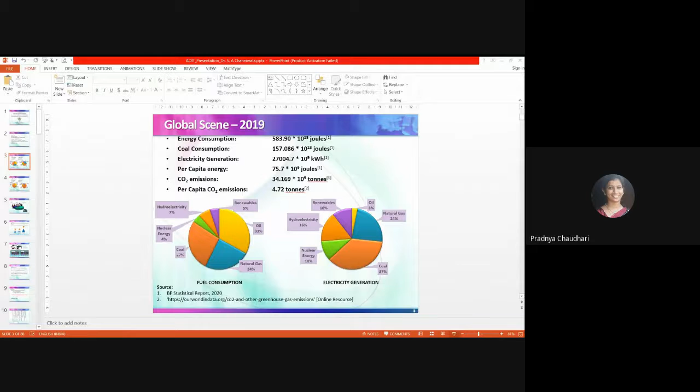Say if you take NOx emissions per year from the transportation sector... Am I audible? The slide you are presenting, we are able to see only the global scene 2019 fuel consumption and electricity generation slide. Should I go back? Is this what you want? No, this is visible, but you are talking about a different percentage, so I am thinking you want to show a different slide. I think I am not able to understand you better. Is this slide visible? Yes sir, it is visible as the global scene 2019 slide. I think the third slide, sir. This is the first slide, okay. Third slide, is it all right now? Yes, yes. Is the third slide visible? Yes sir, correct, I will go slowly.

I have already spoken the numbers, so I will not repeat it. But this is the global scene. Yes sir, correct? Yes. This is the Indian scene.

Everywhere I do give the references. Whenever I give any data, it is from the standard references. Okay sir, okay, okay. This one is only the third slide, okay? Fourth one.

Now coming to the emission part, I already discussed, but you can see here the NOx emissions if you focus on this, from the transportation sector it has crossed more than 20 in 1990, and in 2020 with control measures we have come down to about 17 million metric tons. If we take all sources, it goes to more than 140 million tons of NOx. Then coming to particulate matters, you will be surprised to notice that this emission is less than NOx emissions, because mostly this emission comes from diesel, while NOx comes from all sources. Diesel also gives NOx, but the temperature levels in diesel are more than what we get in petrol, so NOx is higher.

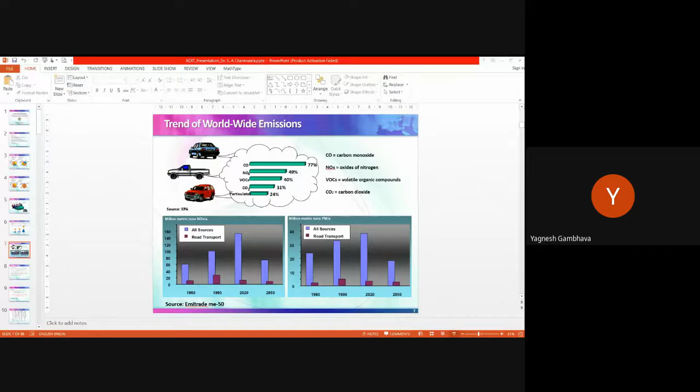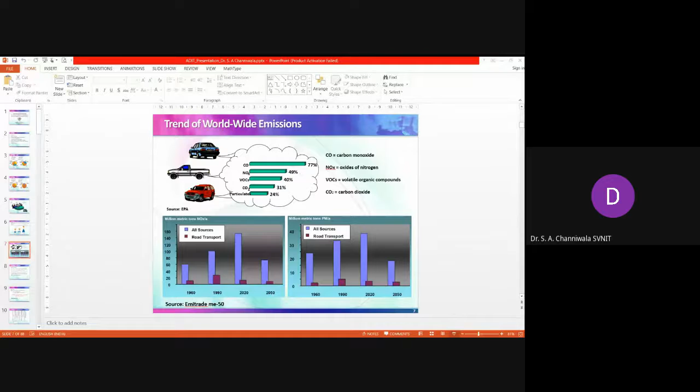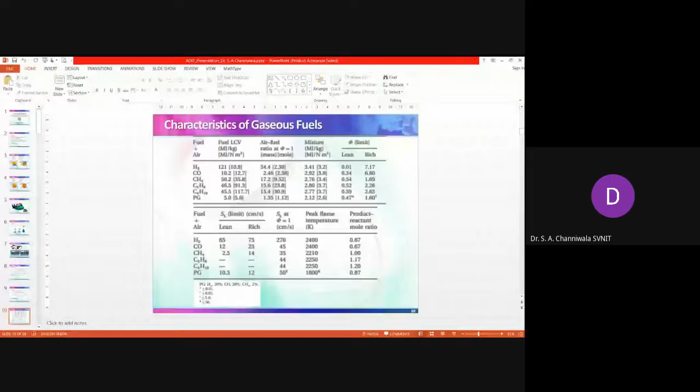Sir, please put it in presentation mode. It is already in presentation mode, it is not a PDF. Press F5. I have already pressed F5. One minute. No change. Let me call the support person again since this is already in presentation mode. Tell them to press F5 again, it already says that. We are already in presentation mode. Now check if it has changed. Okay, do it that way, don't go full screen. Is it visible now, Ronak? Yes sir. I am sorry for the disturbance.

The most important part here is the mixture CV and the equivalence ratio limit range. That particular range tells you in which limit you should control or design your carburetor, otherwise your engine will not work, it will not fire. Similarly, another important limit here is SL, the flame speed.

Hydrogen has a maximum range of flame speed, while methane has a minimum of 2.5 to 14, and that's why CNG fuel engines suffer from efficient combustion problems. If you take laminar flame speed at an equivalence ratio of unity, hydrogen is maximum at 270 centimeters per second, and this is not only advantageous but equally disadvantageous because it gives rise to backfire problems.

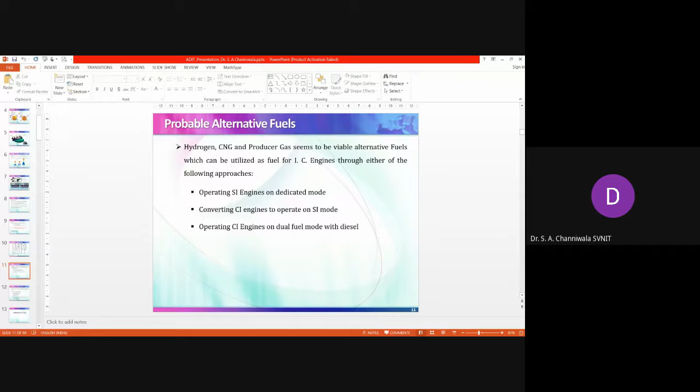For better utilization of alternative fuel on existing IC engines, certain modifications are required based on characteristics of fuels. These include changing valve timing and valve duration, changing the compression ratio, optimizing spark advance, reducing or increasing combustion duration, and your ignition system may require changes. You may need higher voltage to meet minimum ignition energy requirements, and your carburetor or premixture has to be designed according to the flammability limit.

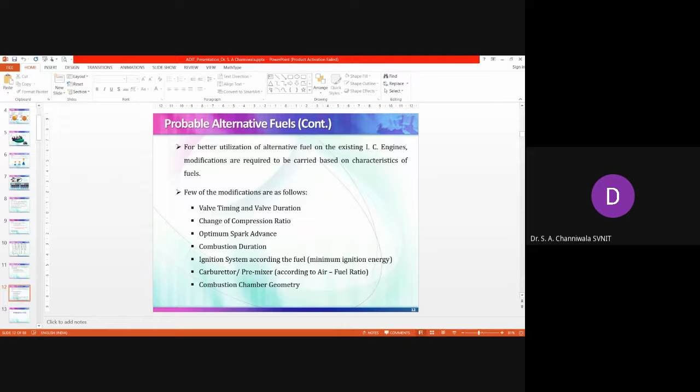It has a very wide flammability limit, 4.72 to 74% by volume. That means it allows utilization over an extremely wide air fuel ratio without misfire. Because it is in gaseous form, it eliminates the problem of atomization, evaporation, mixing, and recondensation. It has a very low ignition energy, which means it allows utilization of spark or even hot wire and diesel ignition with equally good performance.

Because it has a low ignition energy and its flame speed is very high, its instantaneous burning makes it possible to approach the actual engine cycle to the air-standard cycle. This is a major advantage with hydrogen as a fuel.

Then its low emissivity, the flame has a very low emissivity. It reduces heat losses to the cylinder walls, and again it will help in increasing the thermal efficiency of the engine.

Then its self-ignition temperature is quite high. That means you can operate at higher compression ratios without any problem of auto-ignition. It is an extremely clean fuel, less toxic, no poisonous fumes from the exhaust, and no carbonisation in the engine.

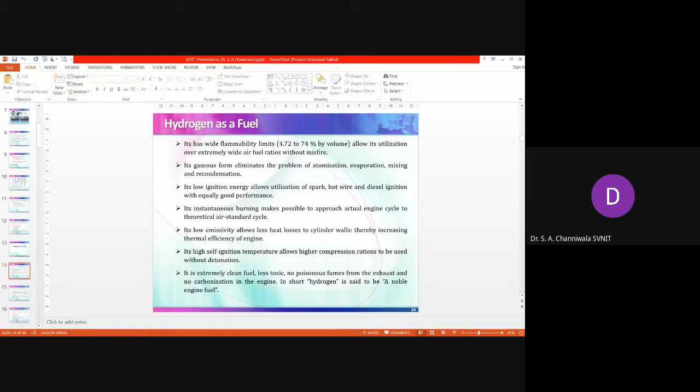So I will call it, hydrogen is said to be a noble engine fuel. Now, anything has its own limitations and problems.

So early researchers who were working on hydrogen were unable to operate above 60% of stoichiometric air fuel ratio because they faced a serious backfire problem. Why does backfire occur? Hydrogen has a very low ignition energy and very high flame speed. That makes backfire occur.

Any high temperature hotspot in the combustion chamber, such as the spark plug, exhaust valve, or carbon deposit, may serve as an adequate source of ignition energy. It will ignite the incoming hydrogen mixture, and backfire will occur. Even the residual gas remaining after the exhaust stroke may also ignite the incoming charge. This is all due to the low ignition energy of hydrogen and its very high flame speed.

One more mechanism has been identified, the non-thermal mechanism. In a multi-cylinder engine, two or more ignition leads run parallel in close proximity for several inches. This will induce an extraneous voltage.

Now with hydrogen, the spark gap is also reduced to compensate for the higher ionization potential of hydrogen-air mixtures and higher compression ratio design. This will induce a voltage of very low energy sometimes in the incoming mixture in another cylinder. That means this can induce backfire, ignition in another cylinder without the official spark occurring. These are the few problems.

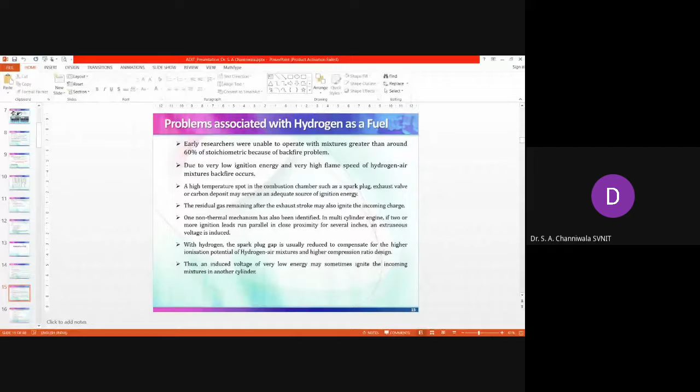So what is the solution? We should understand the problem first. If we carefully understand the problem, then we can arrive at a solution. So how to reduce backfire? Very simple, once we know why backfire occurs we can solve it.

So the first solution is exhaust gas recirculation. There are two problems: backfire plus higher NOx emission. So EGR will reduce flame speed, obviously, and it will also help in reducing the hotspots.

Second, increasing conduction via a higher surface to volume ratio design of the combustion chamber. This will also cool down the temperature levels of the surface, so backfire will reduce. Operating at a lean range will again reduce the backfire.

Many scientists have used the water induction technique. Before I built my engine, IIT Bombay and IIT Delhi were using water induction technique, I will share my experience with hydrogen slightly later. But water induction can also reduce backfire because it gives a cooling effect in the line.

And another important part, delayed entry of hydrogen. Majority of this was invented by us in 1980, when I was working on the hydrogen fuel engine, I will explain what it means. If you can delay the entry of hydrogen, all hotspots will be cooled down by the air, and you will not get any chance of backfire.

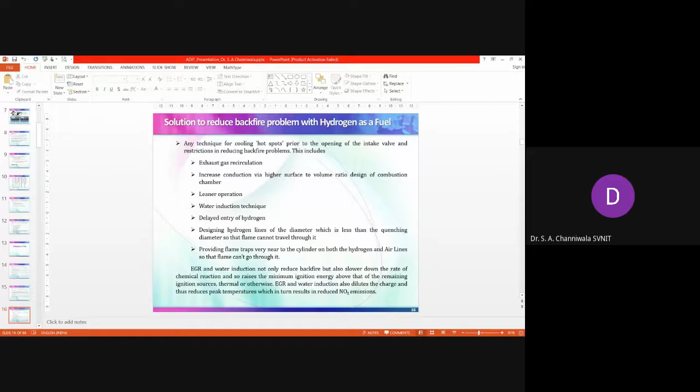And here I have said the same thing I said earlier. EGR and water induction not only reduce backfire but also slow down the rate of chemical reaction, and so raise the minimum ignition energy compared to the remaining ignition sources, thermal or otherwise. This can also reduce NOx because of the lower flame temperatures in the presence of EGR and water.

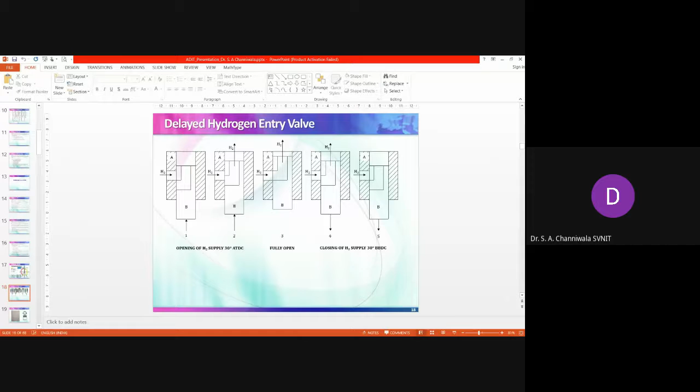This is a cam which we have fabricated. IIT Bombay was earlier, so to speak, a very tough IIT. Everything you have to do by yourself. So this is a cam which I fabricated on a pantograph.

This is the profile you can see. This is the duration for which hydrogen will come. Then we modified the piston geometry to achieve the desired compression ratio. We converted to about 12 as a compression ratio.

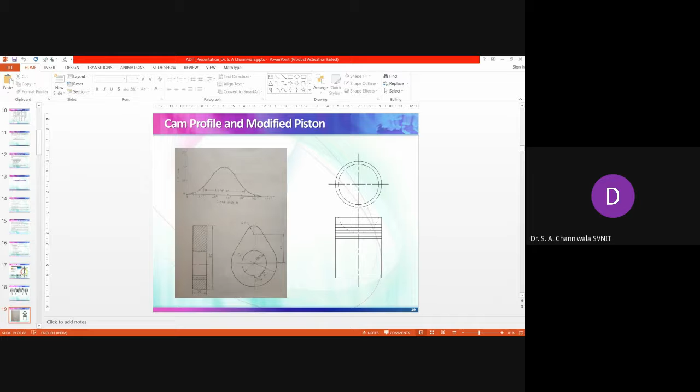And this is the flame trap which we have specifically designed. This flame trap works on the quenching distance principle. We take two brass plates, we drill very small holes. In between the brass plates, we use a 200 micron bronze mesh, so that if the flame occurs anywhere, it cannot travel back to the hydrogen. That is the reason we have put it into the hydrogen trap.

This is also provided into the air line later on, but this is the principle. Your flame can travel only to a distance which is more than the quenching distance. I will explain what quenching distance is.

You take a candle flame, the flame is there. Bring two plates closer and closer to the flame. At one point, the flame will extinguish. So that distance is known as quenching distance.

For hydrogen, it is 0.45 mm to 0.5 mm. For other fuels, this goes to more than 0.6 mm, maybe up to 0.8 mm, right? So this care we will take, and this is my experimental setup.

So while performing the experiment on hydrogen, today I am alive before you, it is God's gift. We were testing leakage in the hydrogen line. All our surge tanks were made of glass, and our pressure gauge glass was borosilicate glass, which can withstand 1.4 bar pressure, but somehow that pressure gauge was sticky.

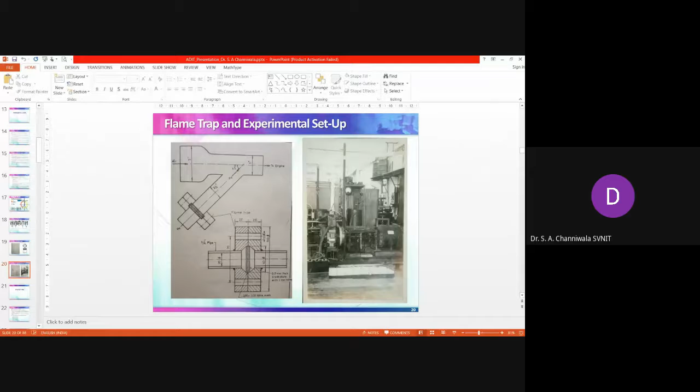And then the water induction technique was not utilized later on. Now, whatever engines you see, they are being operated on our technique, the delayed entry technique. But instead of a cam and other mechanisms, it is now electronically controlled.

Now we come to CNG as a fuel. It's another, you can say, green fuel.

It is cheaper than petrol and diesel. That is one attractive advantage so far as commercial aspect is concerned. It is lighter than air and disperses easily into atmosphere. That is a second advantage.

The octane rating of CNG is higher than gasoline, which means that engines can be operated at higher compression ratio without knock or detonation. Its auto ignition temperature is higher compared to petrol and diesel. Again, we can go for higher compression, that helps.

Then CNG is a cleaner fuel than petrol and diesel. It reduces CO2 emissions by 20 to 30%, CO emissions by 70 to 90%, NOx emissions by 50 to 87%, particulate matter nearly 90%, VOC emissions by 89%. This is the way CNG is superior to petrol and diesel.

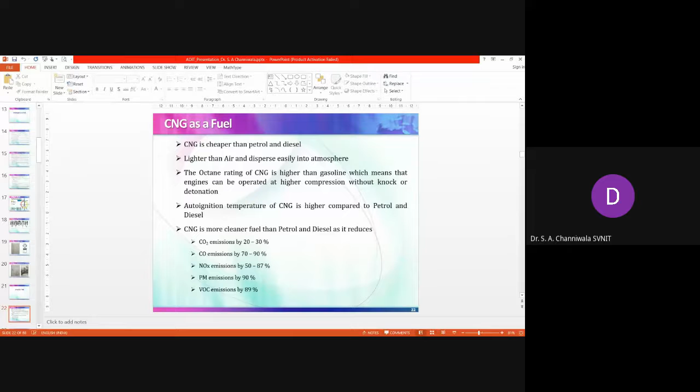Now problems—yeah, I always give the advantages and the problems associated with that fuel. The first problem is CNG gives a lower mixture calorific value and lower laminar flame speed. Lower mixture means 15 to 20% less power output.

Then, if you want to develop a dedicated CNG engine system, it requires more modifications and optimization in the fueling system for complete combustion and better performance.

I will give one idea. When there is a lower laminar flame speed, your combustion duration will be much larger. In order to control that combustion duration, you need to reduce the length of flame travel. Second, you need to provide a certain higher voltage so that you can ignite it bit faster. These are the two modifications which you need to carry out.

That means your L by D ratio has to be less than 1. The 0.8 to 1 range is a limit for CNG as a fuel.

Then CNG vehicles require a greater amount of space for fuel storage, and it is stored at a pressure of 200 to 210 bar. So slightly you can say you are traveling with a small bomb in your vehicle.

Refilling of CNG is a slow process. This also is quite boring. If you are using a CNG car, you have to stand for a longer duration in the queue at your CNG filling station. And the CNG system needs to be tested at fixed intervals of time to ensure the safety of your cylinder. These are the problems.

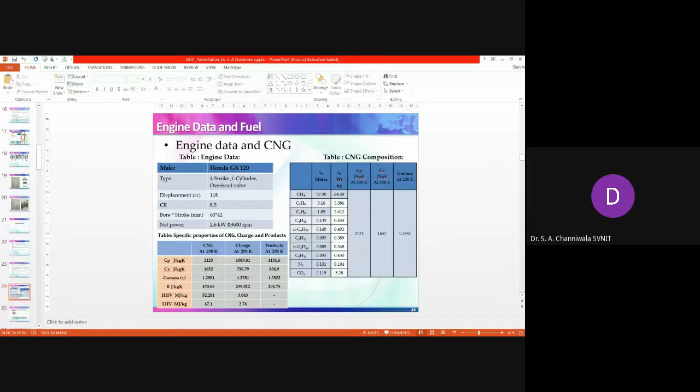Then the simulation process—how it begins. I will go slightly slowly in this particular aspect because I want to let you know how you can simulate it. This process occurs in 5 stages.

First, your suction is modeled, then compression, then combustion, then expansion, and then exhaust. We have carried out the cycle analysis at each 2-degree crank angle, and then carried out a numerical integration. During the simulation, volume, pressure, and temperature at each 2 degrees of crank rotation of the engine are calculated.

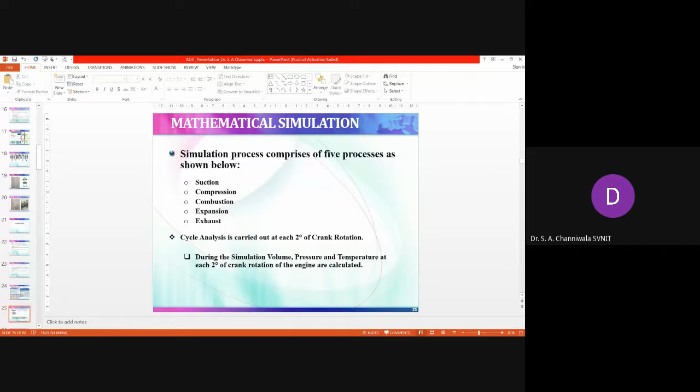Look at the combustion duration. The suction we are starting 10 degrees before TDC to 30 degrees after BDC. Compression is 30 to 24 before TDC. Combustion is 24 to 32. How much duration? 56 degrees is the duration. Hydrogen is much less, almost half, than what duration we use here.

Then the expansion. After combustion, we take up expansion. Anyway, it continues during combustion also, but effective expansion is after combustion, and then exhaust. So these are the durations which have been specified, and this data initially we have taken from

literature and our own experience. And the ignition energy, if you take, is 0.28 millijoules. To meet 0.28 millijoules, you need to go for slightly higher ignition voltage, and that has to be provided in the engine. Otherwise, you will not get good combustion.

Next, before simulation, I advise you to read Heywood. Heywood is one of the best books on internal combustion engines. Majority of the simulation process which I have taken is from Heywood. Somewhere we have used our own analytical process, which I will share here in the modeling part.

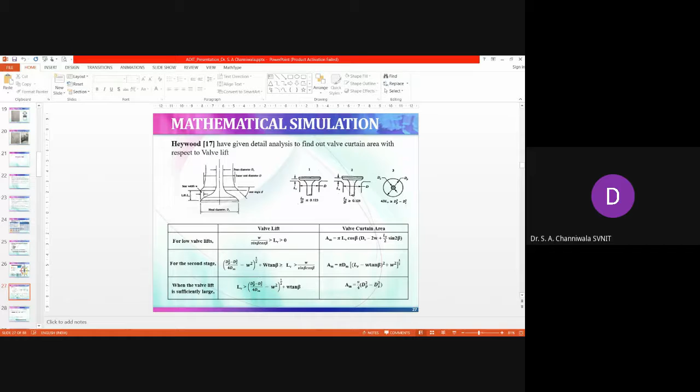So this is the first part: modeling the curtain area with respect to the valve lift. When your theta changes, valve lift changes. When valve lift changes, your CD and curtain area changes. That much, physically, logically, you understand. Now next.

So this is a suction process. The volume at any theta you can calculate from the standard slider crank mechanism equation. Then mass, dm, the small mass entering into the cylinder, is given by the compressible fluid flow equation by Heywood, and you can see the area and the CD are part of this equation. Therefore, this much enters in a theta rotation of 2 degrees. So new mass will be m dot exhaust which was present in the cylinder plus dm which has entered.

Now the new specific heat from energy balance, new temperature again from the energy balance, that is your mixture law, you calculate specific heat and temperature.

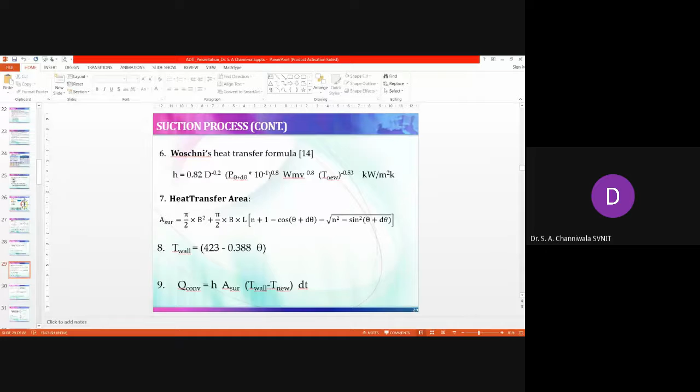Then for calculating, here we have considered heat transfer also. There is a convective heat transfer that occurs during the flow of charge inside the cylinder. Cylinder walls are at a different temperature, mass comes at a different temperature, so there is heat transfer. This is calculated by the standard Woschni's equation, in terms of d, p and the piston velocity w, and this is T new.

So H is calculated. Then this is the heat transfer surface area given again by the slider crank mechanism I have taken. Then the wall temperature we have measured. This was our 1988 work at our institute when we were working on LPG as a fuel. We measured this wall temperature variation, and these variations are given by this equation. This is required to calculate convective heat transfer.

You can see here next is A into H, that is from Woschni's, A from your slider crank mechanism, T wall from our equation, and T new from energy balance. So this is the Q convection loss in suction.

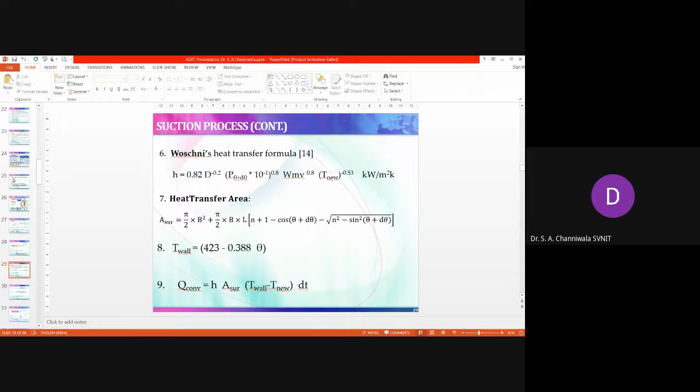Next, so corrected temperature will be calculated after considering your convection losses, convective heat transfer, then the new gas constant, and then the corrected pressure is calculated using the standard ideal gas equation.

Then these are the results of our simulation of the suction process. This is the data of your Honda HX engine. You can see here how the pressure varies. Cylinder pressure falls to 0.064 megapascal at 48 degrees crank angle after TDC, and then it keeps on slightly rising.

Right, then temperature variations: from initial exhaust temperature in the cylinder, it comes down to about 340, 330, and this is the mass. Mass of entry is stabilized after your inlet stroke is over, your suction process is over, you can see a stabilized mass flow rate.

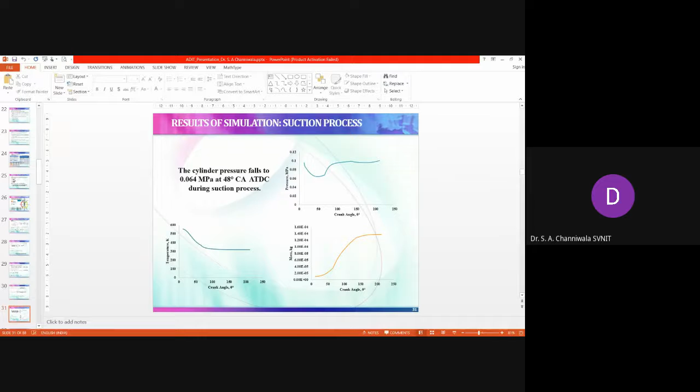Next, then we take compression. Whatever mass has entered now remains fixed, and now you are compressing. So the compression process is modeled by the first law of thermodynamics. That's enough, nothing else. So new temperature by your adiabatic equation, new pressure again by adiabatic equation, and rho by the simple ideal gas equation. These are calculated at every theta plus d theta.

Then the properties of the new fluid. Here again properties will change because you are compressing, so temperature will now keep on changing. These are given by Nusselt and summarized by Heywood. The viscosity is given by this equation, conductivity is given by this equation, and the Reynolds number is rho Vd by mu, from this equation, the standard Reynolds equation.

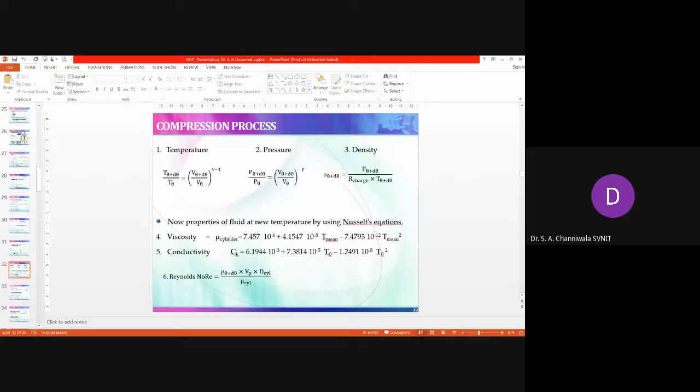Next, the Nusselt number is 0.49 RE raised to 0.7. This is a kind of Annand's correlation. Convective heat transfer is calculated from the Nusselt number CH. Once calculated, your convective heat transfer coefficient and surface area keep on changing by the piston motion, T wall minus T theta plus D theta into dt. Therefore, the corrected temperature is Q convection by this plus T theta plus D theta.

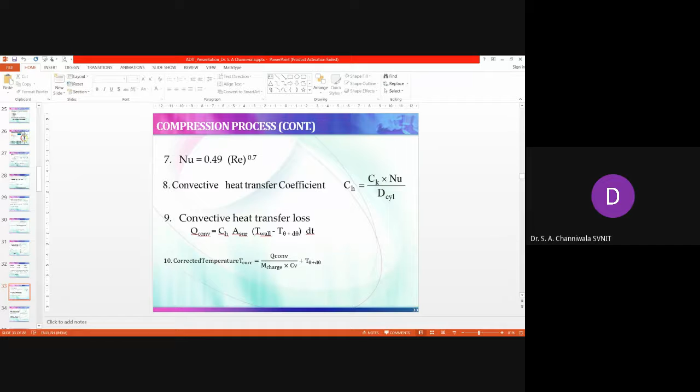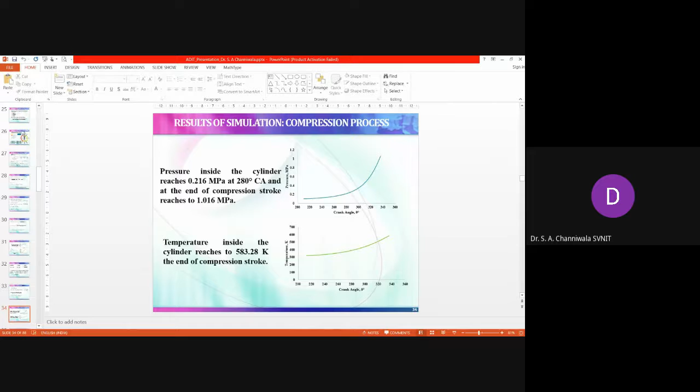Next, the combustion process. Now the combustion process is modeled using Wiebe's function. The Wiebe function gives an S shape. When combustion slowly begins, it then exponentially rises and then slows down at the end. So that is known as the S curve, which is nothing but the Wiebe function for mass fraction burned.

Now the gas constant, again by the mixture law, is B theta into RB and 1 minus B theta into RU. So at every stage, this is all dynamic programming; you need to calculate it. The specific heat at constant volume, again by the mixture law, specific heat at constant pressure by the mixture law, and gamma is Cp theta by Cv theta.

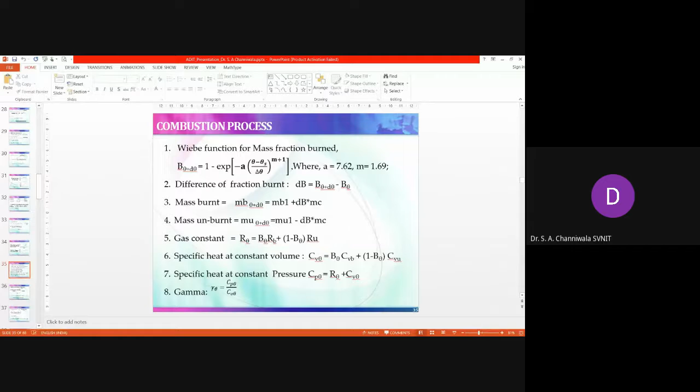Then in the combustion process, the pressure changes by two different mechanisms. One, your volume changes, so pressure rise due to volume change is given by your adiabatic equation, P theta, V theta by V theta plus D theta into gamma. And now there is combustion taking place; as combustion happens, temperature will rise, so there is an expansion taking place, giving rise to pressure rise due to combustion.

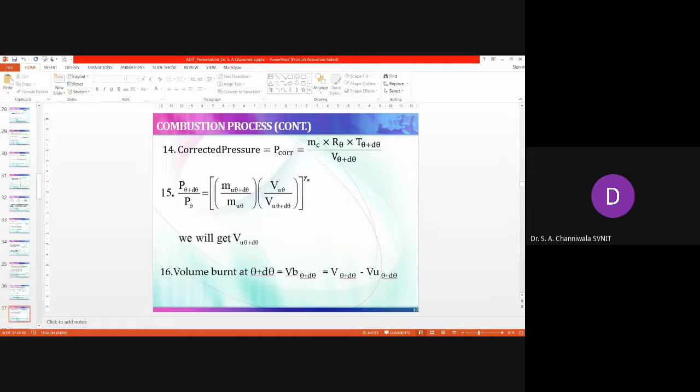Next, the corrected pressure again from the ideal gas equation, and again from the ideal gas equation you get V unburnt at theta plus d theta. So this is how volume burnt at theta is known to you, V theta plus d theta minus Vu theta plus d theta. So this is the new volume. Now you can call it V1 before combustion, and then take it out. Temperature of burnt gas, again from energy balance, temperature unburnt from the ideal gas equation, and then at this new temperature properties are calculated, and again the next stage of combustion will take place. So this is how it is a dynamic program.

Next, these are the results.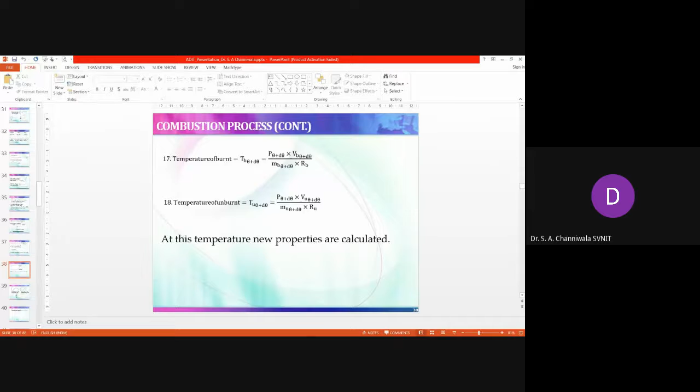The pressure reaches its peak value of 5.074 megapascal at 370. The temperature reaches its peak value at 2269.51 K at 378 crank angle.

And this is your mass burned. Mass is completely burnt after 380. So this gives me an idea that whatever mass was there, it has been completely burned in my simulation also, and that justifies the duration of combustion which you have taken is correct. You can now optimize: if I shut down this combustion process at, let me say, 380, will it work? According to this result, it should work. So that way you can optimize your combustion duration and spark timing.

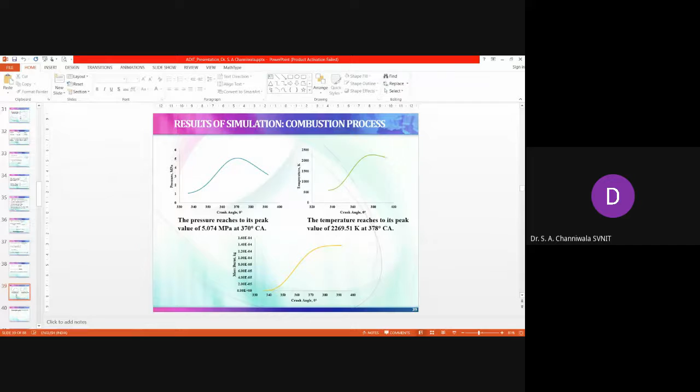Then expansion and exhaust process are similar. Expansion is modeled as compression against, so exhaust is modeled similar to suction, only it's the opposite process.

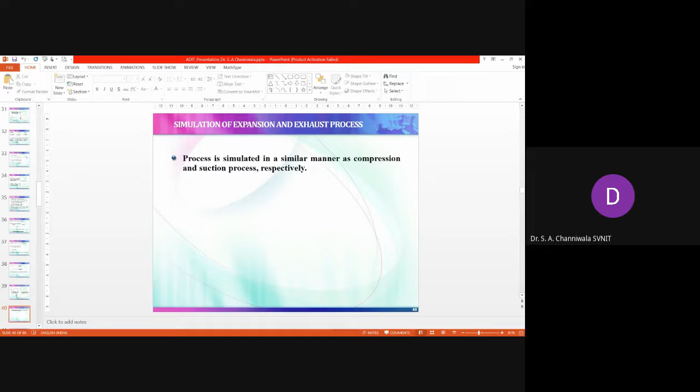This is my exhaust process. Exhaust here is slightly, you can imagine, what is happening is initially there is a fast release, and whatever you have learned in your standard books, that there is a blow off. So this is what is your blow off.

Pressure falls to 0.1024 megapascal at 618 crank angle. This is happening because burnt mass is forced to leave the cylinder space due to very high pressure differential. That is your blow off.

After that, the valve starts gradually closing up, so there is a throttling effect, and some pressure build-up you can see inside the cylinder. Temperature at the end of exhaust at 720 is 326.92 K, which is quite near to your atmospheric 300 K. And this is the cyclic process.

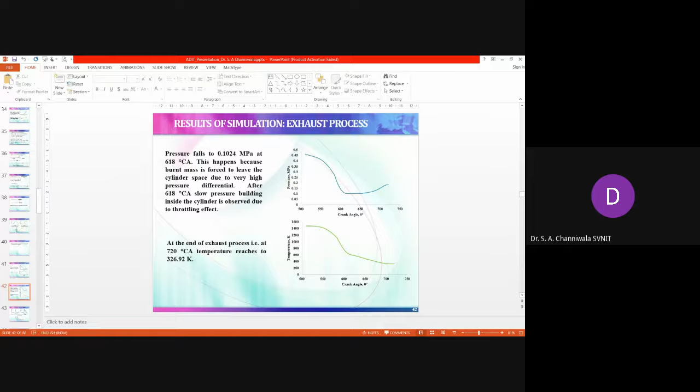Next, and this is a complete simulation. Your P-theta diagram, pressure 5.074 megapascal, temperature 2269.51, and this is a PV diagram. You can see how exactly you are simulating the actual PV diagram which you get on your indicator diagram, and this is the method which gives a quite foolproof result.

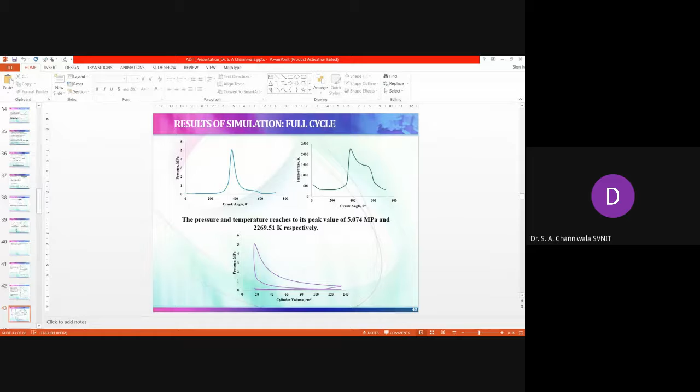Now validation. Anything which we do has to be validated. So as per specifications, this Honda GX has to give 2.6 kilowatt at 3600 RPM with gasoline as fuel. What we obtain as indicated power from data obtained from simulation is 2.1152 kilowatt at 3600 RPM. For CNG as fuel for the same engine, this shows a reduction of 18.65% in power.

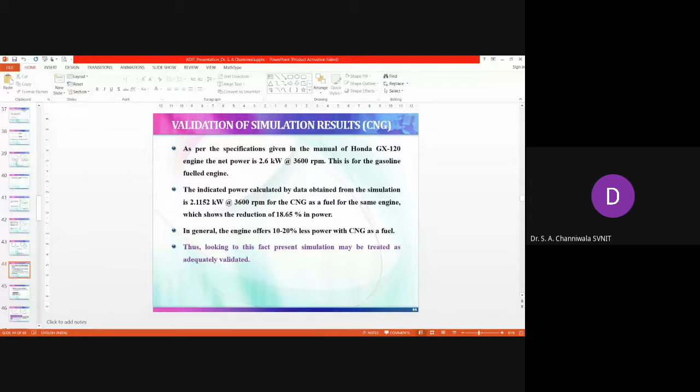If you look toward the literature, and I will show you our IIT Bombay work slightly later, in general engines offer 10 to 20% less power with CNG as fuel because of lower mixture calorific value, plus - I use the word plus - lower laminar flame speed. So it confirms validation. Thus, looking at this fact, we can say the present simulation may be treated as adequately validated.

Then we took up the optimization part. We did not stop here. Once we simulated, we tried to optimize it. What did we optimize? Before optimization, understand one thing: if you look at any research paper, unfortunately most researchers are silent about two parameters - valve timing and engine swept volume.

They say we optimize, but when you optimize the compression ratio, your swept volume changes, right? When you optimize in terms of valve timing, your valve timing changes. But in realistic optimization, you need first to keep valve timing and engine swept volume constant under all cases. Then what we have studied is the effect of ignition advance, effect of L by D ratio, and effect of compression ratio. These three parameters are quite critical, so we studied these particular three parameters using the same mathematical model.

Now this is the range of L, you can see here. Ignition timing we change from 24 to 30 degree before TDC. And what result we have obtained is that indicated power is gradually improving when you go for higher ignition advance. This can be explained on the basis of poor flame velocity of CNG, because when flame travels very slowly, you will reach peak pressure near TDC and hence get higher power output when you keep on advancing.

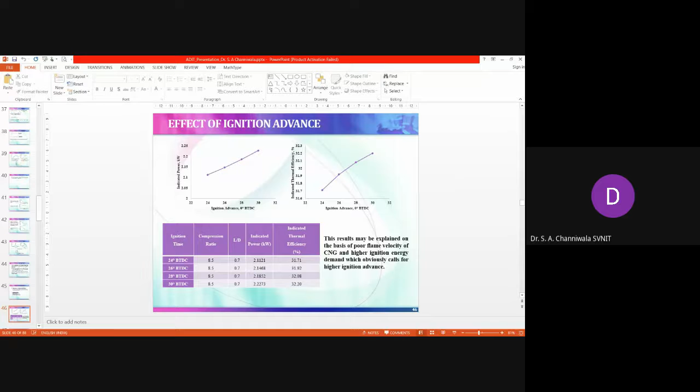Now the second parameter, L by D ratio, we have changed from 0.7 to 1. I already said with CNG as fuel, flame velocity being less, you need to work with lower L by D ratios so that length of flame travel is minimum and you get peak pressure near TDC. At L by D equal to 0.9, this offers compact combustion and minimum length of flame travel, which favors combustion of low flame velocity fuel like CNG, and this improves the performance.

This is work done by Rajesh Iyer, my PhD student. We have also done experimental work and proved that L by D 0.9 gives better results as compared to any other L by D ratio.

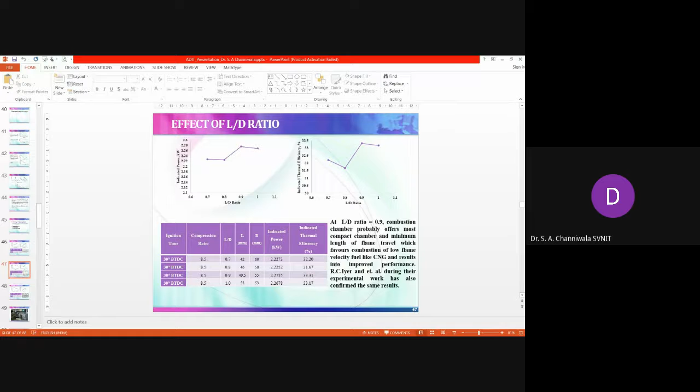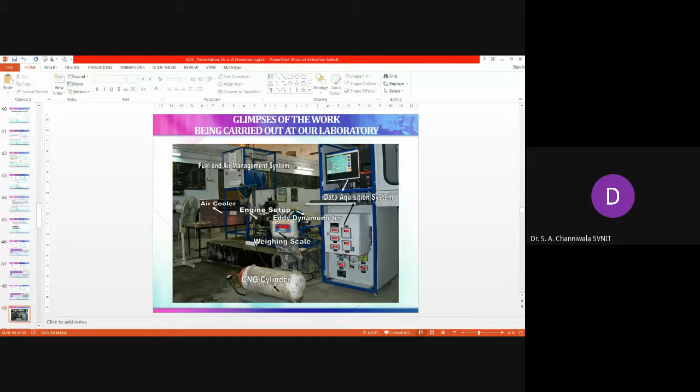This is my experimental setup, this is my test engine. We used 3 different categories of pistons: piston A, piston B, and piston C, with different L by D ratios of 0.9, 1 and 1.1, three different L by D. We specifically developed this; the length of crankshaft connecting rod was changed accordingly, and piston geometry has also been changed. In piston A there are 2 cleavage surfaces of different dimension, piston B has 2 cleavage at the end with different dimension, and piston C has no cleavage, only a central depression, but different geometry.

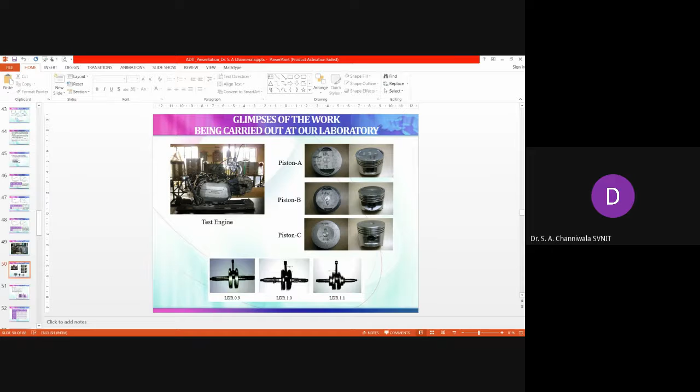And what results have we obtained? So for piston A, we gave high ignition voltage, and we have given comparison with petrol and CNG in kilometers per kg and kilometers per liter. Look at the figure: A equal to 0.9, that is we have run the engine with different pistons of different geometries, with petrol and CNG both as fuel. A quite massive experimental work has been done.

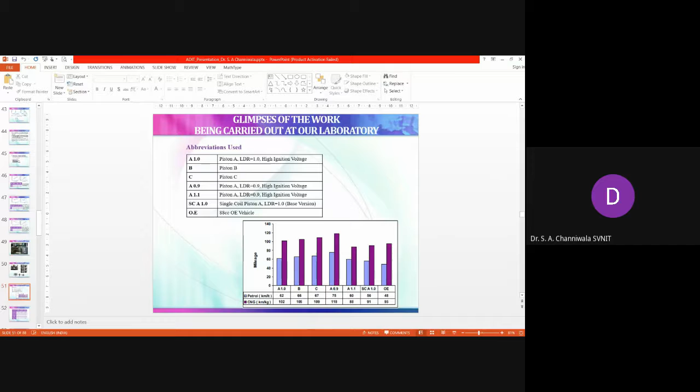So piston A is L by D 0.9, and we have given high ignition voltage. This 0.9, if you look, gives the best results in terms of mileage: 118 kilometers per kg, whereas with petrol we are getting only 75 kilometers per liter. This is the way in which we have experimentally optimized this, and this engine was fitted on the Hero Honda engine, and we have taken field trials also. This is the result of experimental results, and this is the comparison.

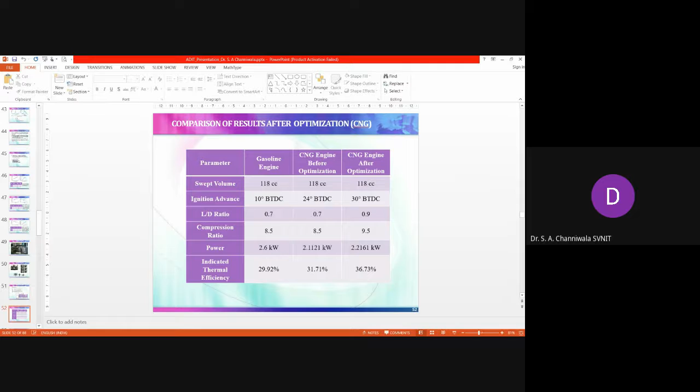This is what we have achieved in reality. And this is again comparison after optimization.

Now this is data which we have already seen, so I will not read it.

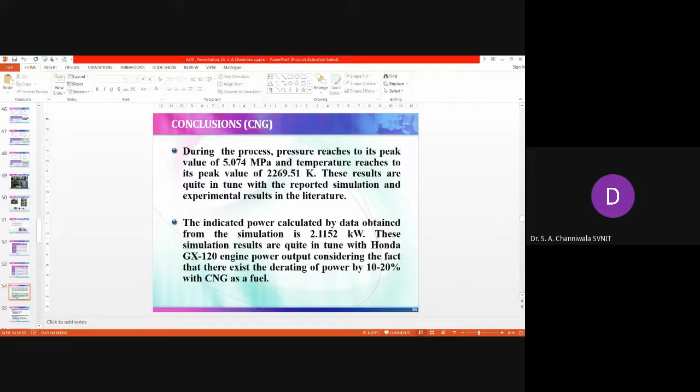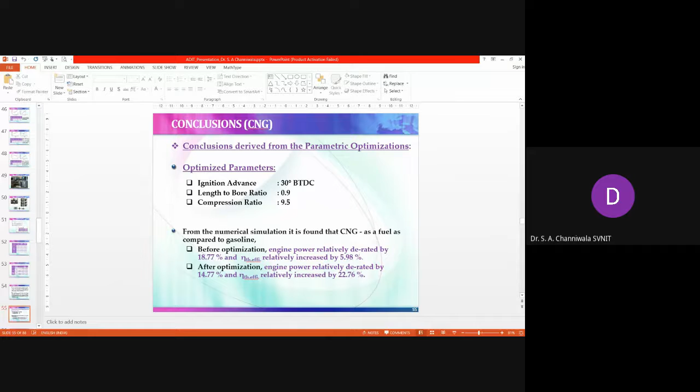From numerical simulation, we found that before optimization, engine power was relatively derated by 18.77% and eta thermal relatively increased by 5.98%. After optimization, engine power relative derating has been reduced to 14.77%, while efficiency increased to 22.76%.

Then now come to the third fuel, producer gas as a fuel.

So how do we get producer gas? We get it from gasification. Gasification is a clean energy technology. It will produce gases that preserve as much as possible the heat of combustion of the feedstock. What constituents do we have? Methane, CO, and H2. These are the combustible constituents which we get in this producer gas.

There are minimum particulate emissions, so there is no particulate emissions when we use producer gas as a fuel. Gasification improves the overall conversion efficiency by 1 to 3%. It reduces particulate emissions, CO2 by 50 to 80%, and CO by 10 to 30%. It enables gaining a carbon credit for underdeveloped countries like India.

Second most important part is India is very rich in coal. So if we adopt coal gasification, probably it's a better option for us to get producer gas through coal gasification.

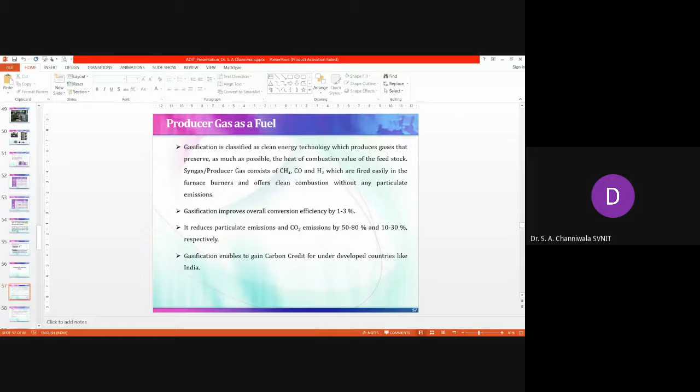Then again, problems. Producer gas has a much lower calorific value even than CNG and gasoline. Further, due to availability of CO in the producer gas mixture, ignition energy required is higher for producer gas than CNG and gasoline. Because of this too, the power produced by a producer gas fired engine is lower.

The producer gas quality keeps on changing when you change your feedstock, so it is also another variable. And producer gas requires higher storage space due to its lower calorific value. These are a few problems which are associated with it.

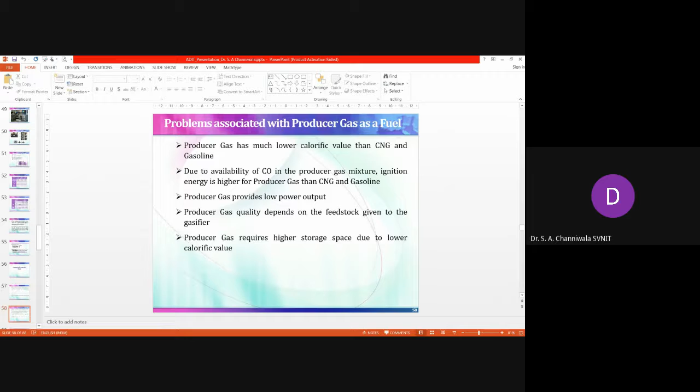Again, same thing, we took the same engine, but what change did we make? We changed to producer gas, which we have. These are properties of producer gas, you can see, and then the below table is the properties of producer gas charge and products.

You can see here, mixture HHV is much less, charge is 2405 kilojoule per kg. All the thermodynamic properties we have worked out, with charge at 298 K and products at the exhaust temperature of 553 K.

This is used in our simulation. The simulation process is similar to what I explained to you earlier for CNG in good detail.

Anyway, it will take much time for you to understand it thoroughly. Unless you sit with it by yourself, you cannot enjoy the fruits of that simulation results. So my advice: try to understand it. Sit peacefully in your lab. Do not sit in your home. Sit in the lab and work.

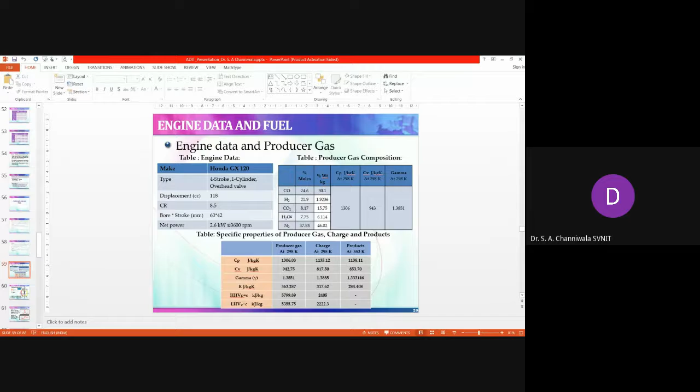And then these are the results. A complete cycle result I am sharing. Suction pressure changes from 0.93 to 0.55 minimum and then coming back to 1.013 bar. Compression begins at 1.013 bar and reaches a peak of 14.52 bar.

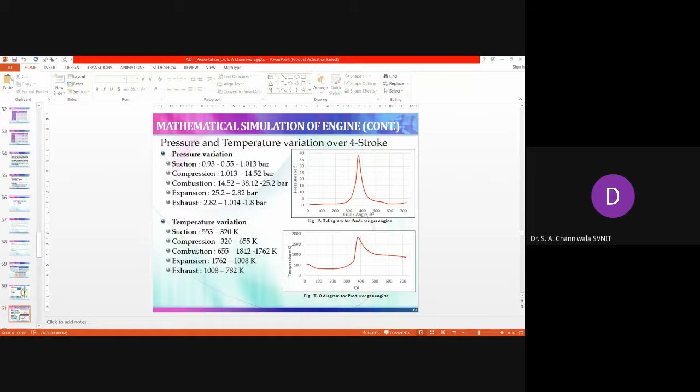And this is a complete cycle. Again, the actual cycle is perfectly matching. Here, the power we have calculated is 2.16 kilowatt. Efficiency, which I'll talk about later, is 26.76%, and the mean effective pressure is 6.05 bar. With producer gas, obviously your mean effective pressure will be less, 6.05 bar. This is the complete simulation data.

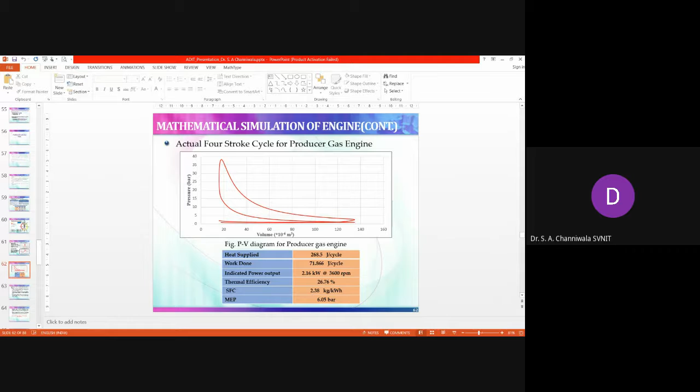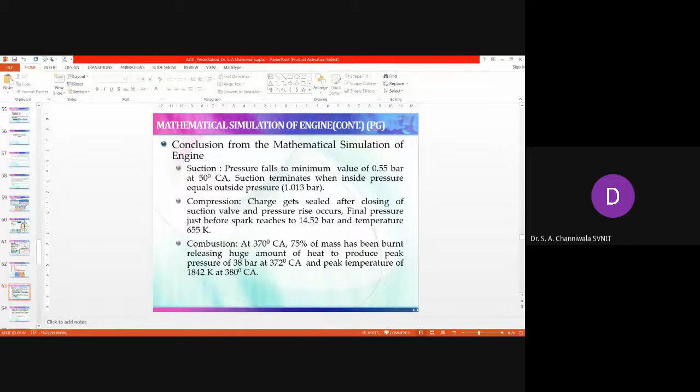And this is the conclusion which I have already read from the mathematical modeling, let me explain to you. One last line: combustion happens ATDC, after TDC there is scope for improvement. Now, this part, what we did was—

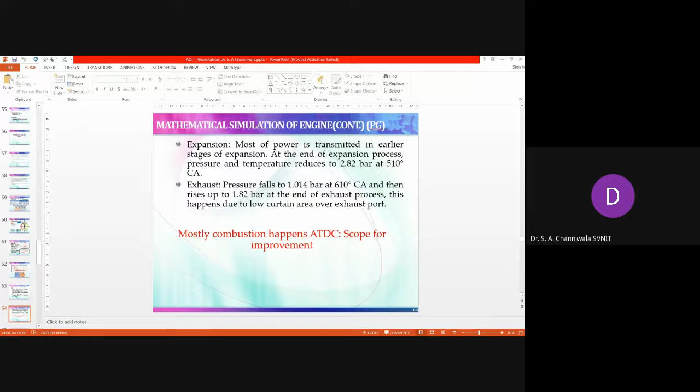Later on, what we did was take up CFD studies, which I will tell you about. The full cycle analysis shows the power output is 2.16 kilowatt, so the relative derating is 16.9%. Thermal efficiency is 26.76%; here there is a decrease. With CNG earlier it was an increase, but here it is a decrease of 9.5% compared to gasoline.

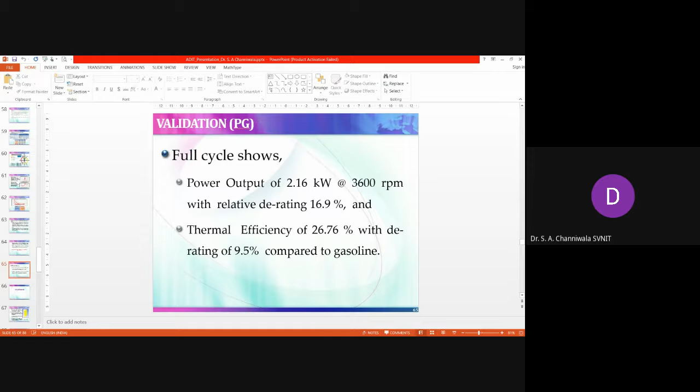Then we went for CFD analysis because we needed to modify our combustion geometry. We needed to optimize a few parameters so that we could achieve reasonably respectable results.

So what we did was perform a complete simulation of flow field and flame interaction inside the chamber. We selected the simulation from IVC to EV open — that is the complete compression, combustion, and expansion. This simulation was done taking only a 45-degree sector, otherwise the computational domain would become very large and we couldn't handle it on a normal computer.

And we used a structured mesh: 20640 nodes and 17985 elements at the TDC condition. We incorporated the TDC condition by taking a 0.5 mm basic elemental size, meaning we reduced that size when we came to the TDC position.

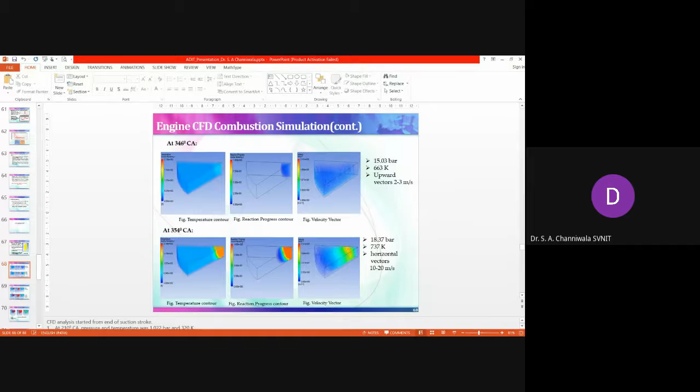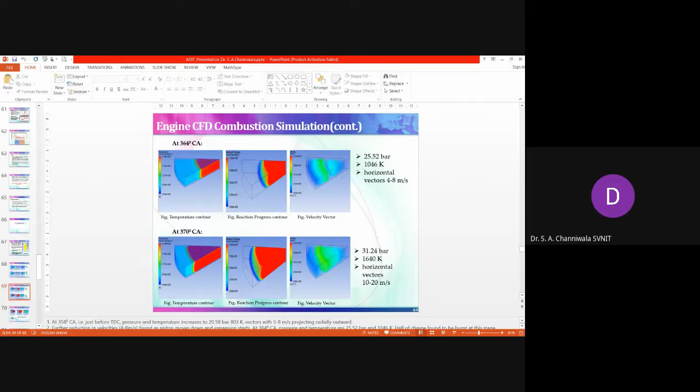At 374 crank angle, the pressure again increases to 37.75 bar, 1870 K temperature, and horizontal vectors 5 to 10 meters per second. The peak pressure we obtain is 38.87 bar at 376 crank angle.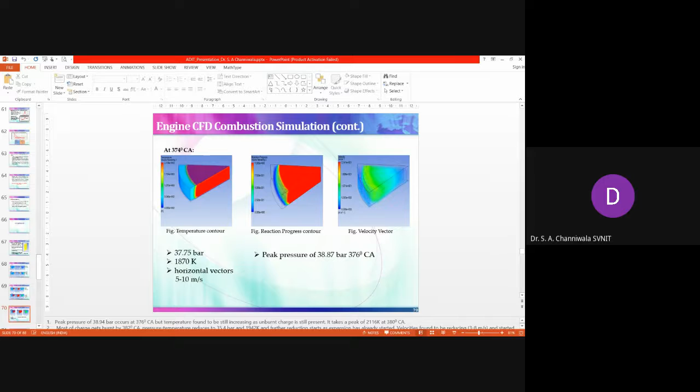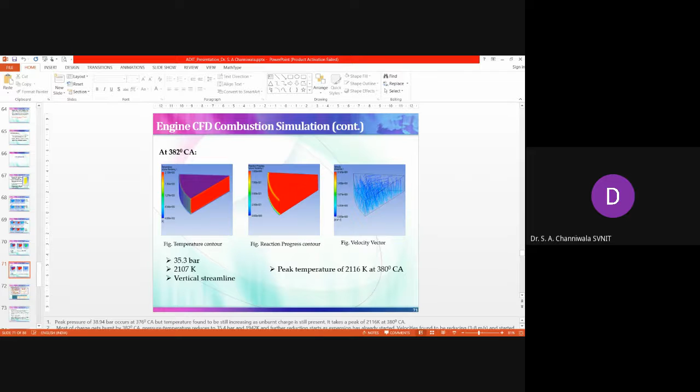At 382, now there is complete combustion. 35.3 bar, 2107 K, and vertical streamlines. So the streamline has changed, and the peak temperature is 2116 K at 380 degrees CA.

Then validation. Validation is very simple. With petrol, our power output was 2.6 kilowatt, efficiency 29.6%. Our mathematical model shows 2.16 kilowatt and 26.76%. That means the relative derating in power and efficiency is 16.9% and 9.5%.

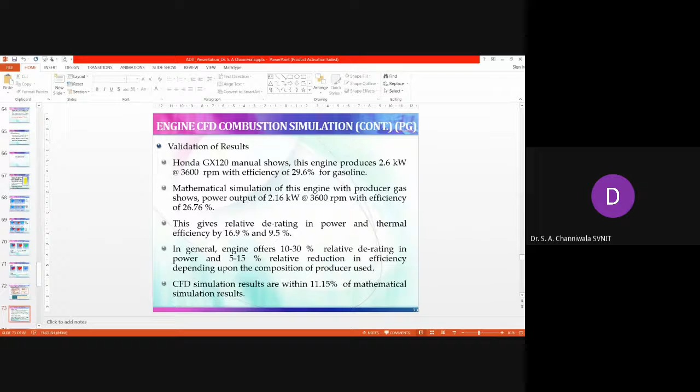In general, engines offer 10 to 30% relative derating in power and 5 to 15% relative reduction in efficiency, depending upon the composition of the producer gas used. This means our results are quite validated, in tune with published literature results. While CFD results, if you look, they are within 11.15% of the mathematical simulation results. This I've already discussed, so we'll just pass it on.

CFD again. Now, the laminar flame speed which we are predicting is done by UDF in CFD. So there are two options with me: either I redefine the UDF and find out the M and A parameters to be used in my mathematical modeling, or I take it as it is, what I have obtained, and recalculate A and M using the mathematical model.

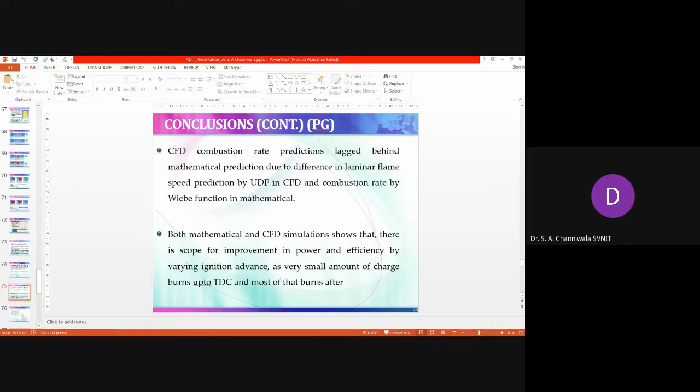What is possible, right? Now, one last line you see is that mathematical and CFD simulations show there is scope for improvement in power and efficiency by varying ignition advance, as a very small amount of charge burns up to TDC and most of it burns after. This is an observation from both the mathematical model and CFD. So next, what we did was, next...

Before that, I will share our IIT Bombay results. Sasikanta was working in 1990, and I was also there at IIT Bombay. We developed a 15 kilowatt gasifier system engine. This is a schematic diagram of the engine system. We designed our own mixer and converted that engine to run in different modes. This is the engine details, from IIT Bombay, 1991-92. We worked on this producer gas-fired engine.

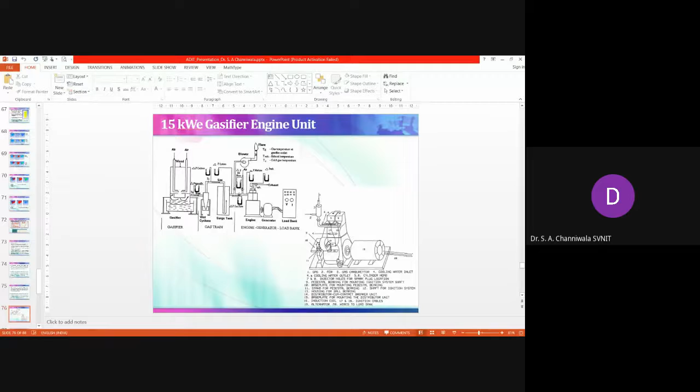Now we were very thorough in the sense that this was a 15 kilowatt, 1500 RPM engine with a compression ratio of 17, a Kirloskar Cummins engine. First we carried out a performance test with pure diesel as fuel. Then we designed a mixture, a carburetor Venturi mixer. We operated the engine in dual fuel mode, with no change to the injection timing with diesel, and in the suction we supplied the producer gas - that is dual fuel mode.

Then we used spark ignition. We removed the injector, and in its place installed a spark plug and incorporated a spark ignition system. We call it SIPGE, spark ignition producer gas fired engine. Here we changed the compression ratio, from 17 to 11.5 is to 1.

If you look at the data, SIPGE gave us a percentage derating of 12% with producer gas as fuel. That is the observable part - 12% derating obtained with SIPGE, the spark ignition producer gas fired engine.

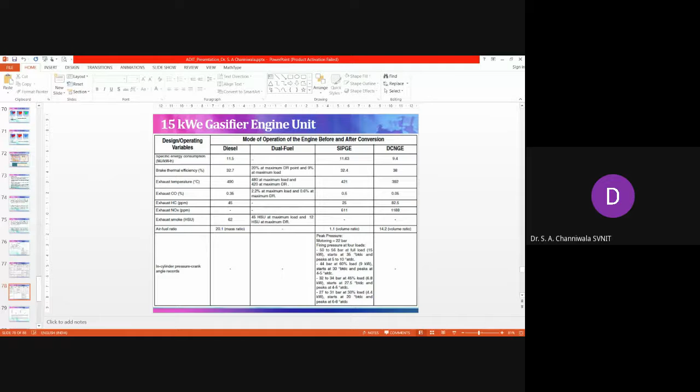Now next. Our focus when we started working here was not only engine parametric optimization, but we wanted to ensure emissions were minimized. So we optimized the valve timing and duration, and studied how CO emission and NOx vary. We could not see any specific trend with respect to timing, EV closing after TDC, and CO and NOx.

But we could observe two things: minimum CO emissions are obtained with IV opening at 20 degrees before TDC and EV closing at 22 degrees after TDC. That gives me a guideline for minimizing CO emissions. Similarly, NOx is minimum with IV opening at 20 degrees before TDC and EV closing at 26 degrees after TDC. This gives guidance on what valve timing to use in real life engines with producer gas as fuel.

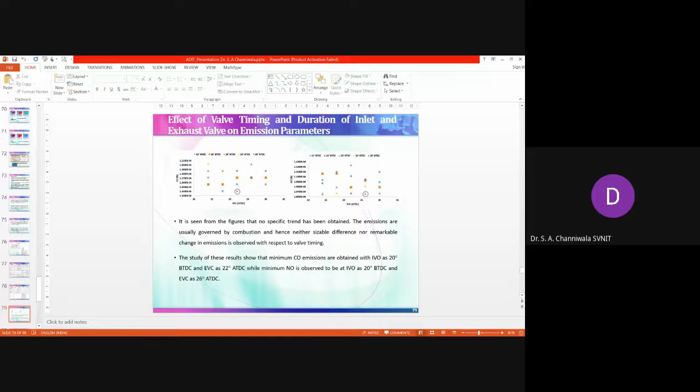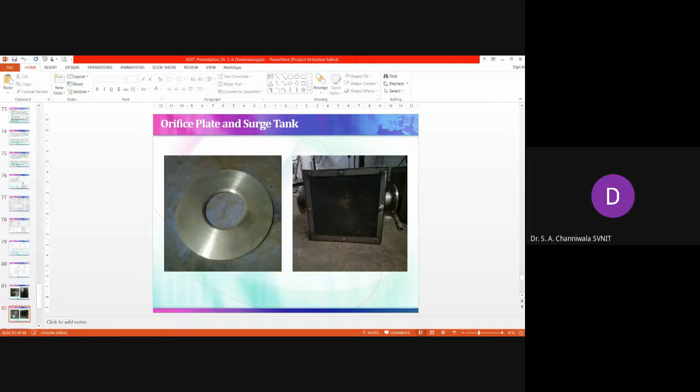Next, these are the few header and water seal components of the setup. This is the orifice and surge tank.

And this is the overall comparison of simulation results. Gasoline power 2.6 kilowatt, efficiency 29.92%. CNG mathematical modeling gave 2.11 kilowatt; after optimization we obtained 2.22 kilowatt, with efficiency 31.71% and 36.73%. PG power 2.16 kilowatt, efficiency 26.76%, while CFD gave 2.39 kilowatt, efficiency 29.77%, which is comparable to gasoline engines.

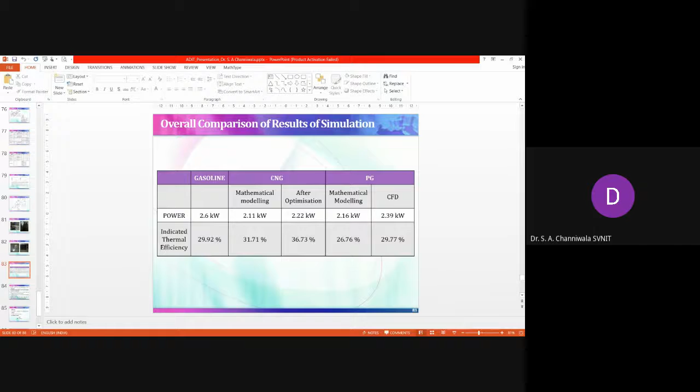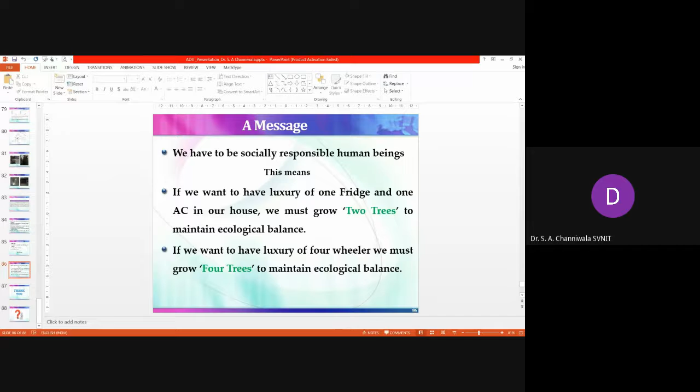And as usual, I always give this message: we have to be socially responsible human beings. This means if we want the luxury of one fridge and one AC in our house, we must grow 2 trees to maintain ecological balance. If we want the luxury of a four-wheeler, we must grow 4 trees to maintain ecological balance. So thank you all.

Any questions, I will share with you. Thank you, sir.

There are some questions, and I will read them for you. Mr. Pradeep R has floated a question: can alternative fuels survive EVs? I guess he means EVs as electric vehicle. I don't see any issue.

There is one more question, sir. Producer gas can be condensed and used to produce wood oil or bio-oil. So I think he wants you to talk about wood oil. Yes, it can be generated using wood. Any biomass can be used to produce producer gas through the gasification route, right?

Sir, there is one question from my side. As I also belong to this field, internal combustion engine, I've been teaching this subject for the last 10 years. As per your wisdom, how far do you see IC engines being used in transportation?